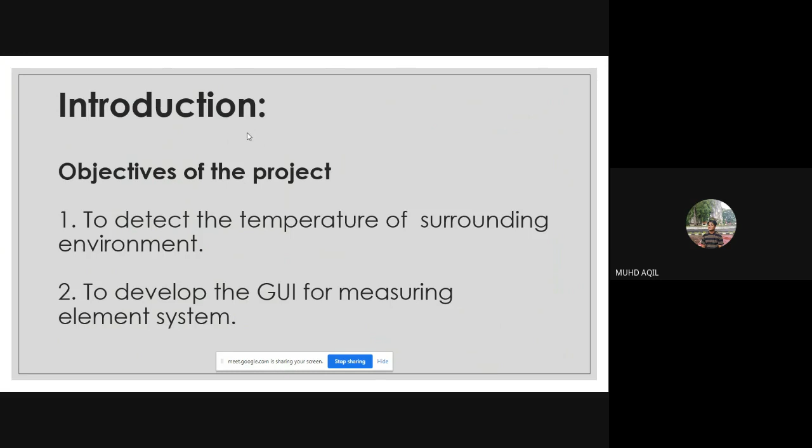For the introduction, the objective of the project: first, to detect the temperature of the surrounding environment; second, to develop a GUI for the measuring element system.

Now for the background research. First, we are targeting Malaysia only, as Malaysia experiences hot and rainy weather throughout the year. Second, the average daily temperature throughout Malaysia is between 21 degrees Celsius to 32 degrees Celsius.

Let me interrupt for a moment. It's okay, it's not that your marks will suffer if your English is not good. I'm just commenting so you can improve. For the 21 degrees Celsius part, I would insist you make it better by saying 'we are focusing and limiting our studies only to Malaysia,' rather than 'we are targeting in country Malaysia only that can be used,' which is actually very wrong and confusing.

So just say we limit our studies or our work to Malaysia. And the average daily temperature throughout Malaysia is between 21 degrees Celsius to, I'm not sure, 32 degrees Celsius is right or not — if I'm not mistaken it should be higher, because there was a time when I was riding across Shah Alam and the temperature stated there was 34 degrees Celsius. So double check your 32 degrees Celsius figure.

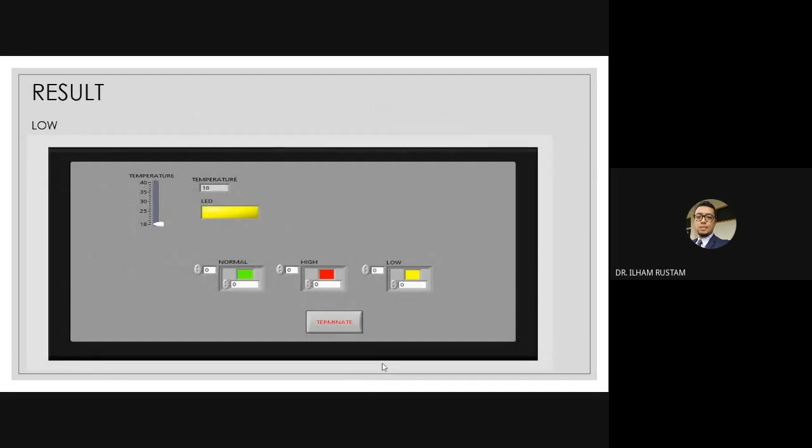That's my question. Can you go to the front panel? That's in the simulation. Oh, it's okay, simulation. Okay, then we'll proceed with your slide first, and then we'll go to the simulation.

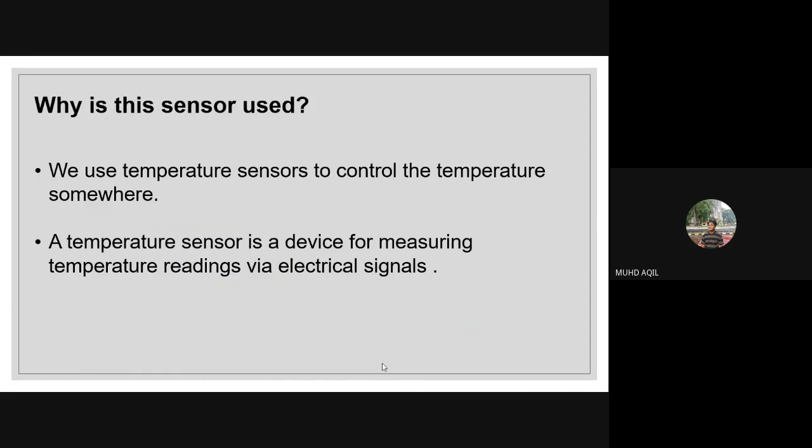Next, what is this sensor used for? First, we use a temperature sensor to control the temperature somewhere. We know that in Malaysia, there are only two climates, which are sunny and rainy. Second, a temperature sensor is a device for measuring temperature readings via electrical signals.

Next, how does the sensor do its measurement? Temperature sensor detects when the temperature is high, normal, and low. Second, we use three colors, which is red for high, green for normal, and yellow for low.

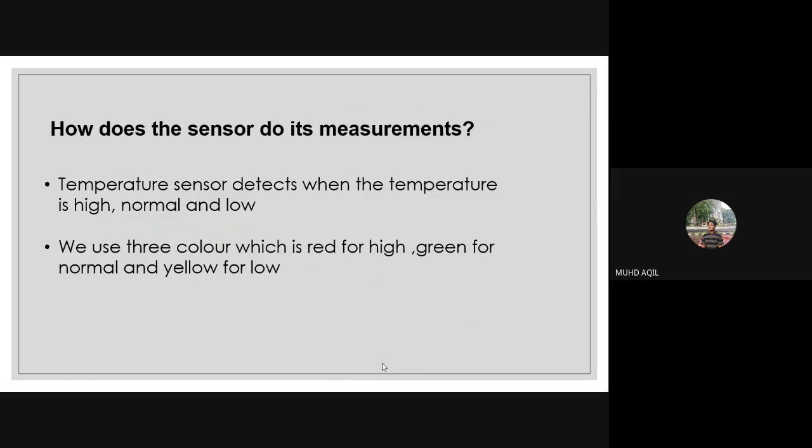Okay, for other examples of sensors that can be used as well, although not being used in our proposal, is the humidity sensor.

This sensor works to detect change in temperature in the surrounding air. This sensor works to detect...

This sensor is the same concept as the temperature sensor, that is, it detects temperature reading through electrical signal.

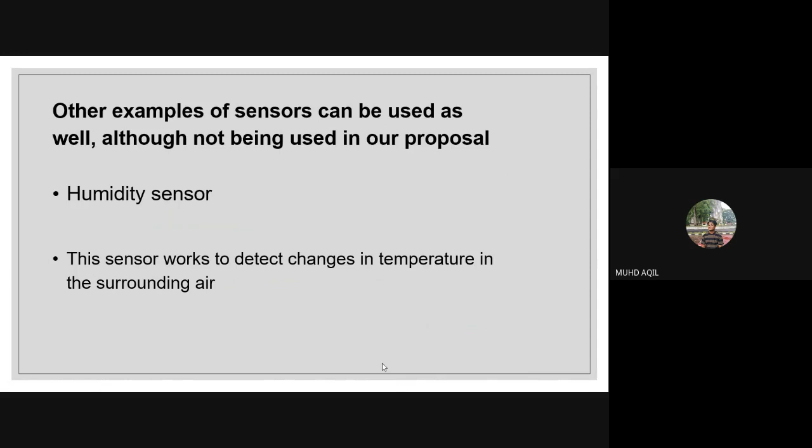Next, the graphical user interface, which is GUI. For our simulation, we use a temperature slider as our GUI. We use this temperature slider because it can control the temperature as we wish. And the temperature slider is connected to the numeric indicator.

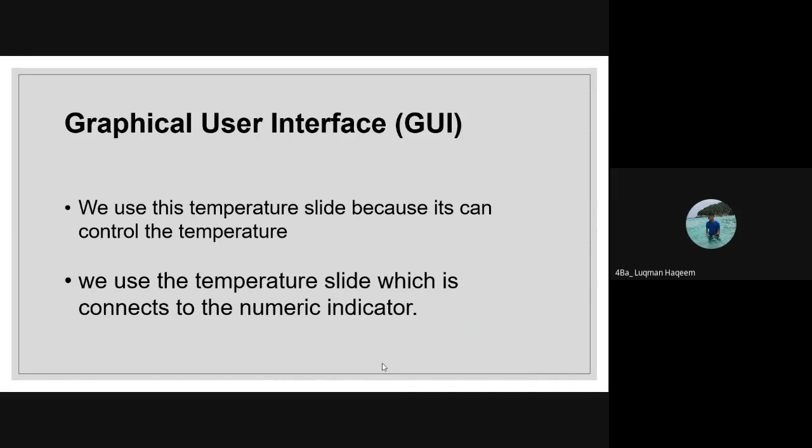Okay, next. For the result, this is the result for the low temperature. When the temperature is low, the LED will turn yellow.

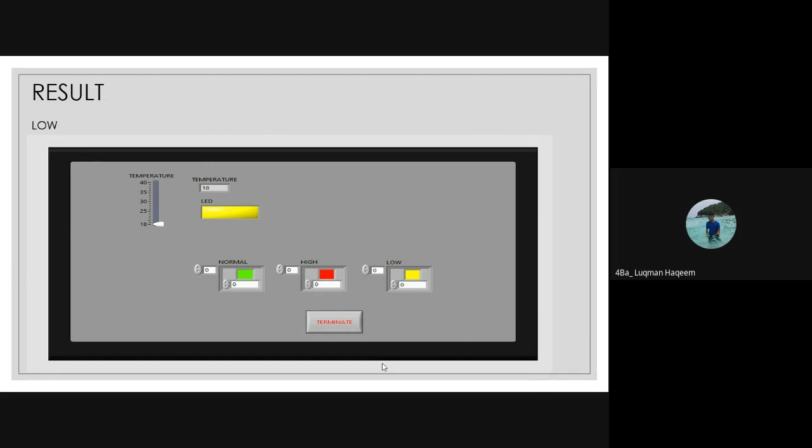And we go to the block diagram. No block. Okay, next we go to normal, which is when the temperature reaches 25, the LED will turn green, which means it's the normal temperature.

And next for the high temperature, when the temperature is above 30, the LED will turn red and show the high temperature.

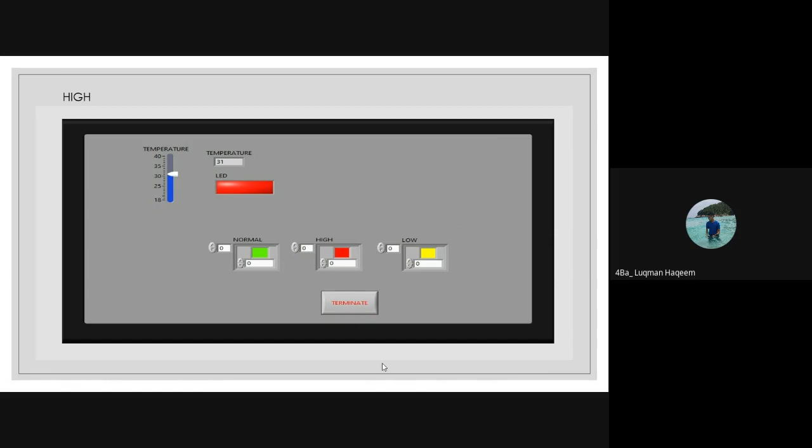Okay, next. Can you go back to another slide? For this one, I don't actually agree with you using the LED meter here because it indicates something like for normal, I could change the value or something. The first time I'm looking at this, I thought the LED that you put down there, the one that you didn't connect to anything - I understand now that your LED here is just to indicate the color of low, high, or normal operation, right?

Yes, yes. So when it has some sort of scale on the side and at the bottom, I thought this was something that I could change if I were in front of the front panel. So I don't agree with you guys using this. If possible, I think you can just use the LED there.

Can you go the same LED that you use for your while block diagram? So that same LED, instead of connecting it to the while condition, you can just put it outside, substitute that with the LED that you're using right now, and just change the color rather than like this. Because if you have a scale like this, it seems like I can do something to it, when the intention was just to indicate the color of the operation.

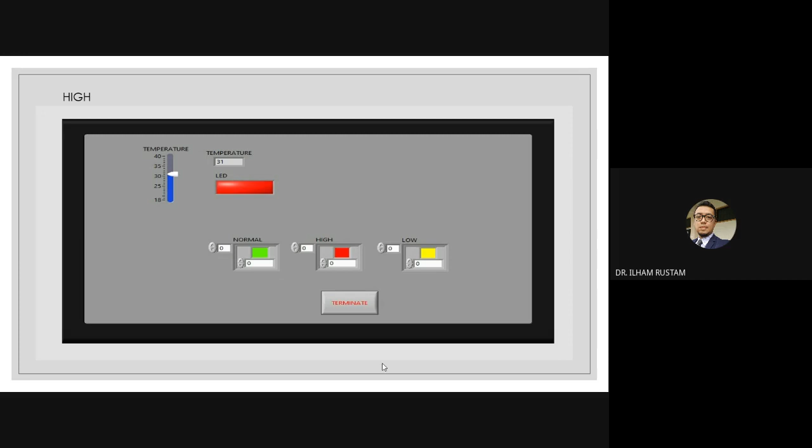Okay, next, last one, discussion. For our discussion, with the temperature control, we can control and detect the temperature around us and also provide comfort to others. Next, we identify some components suitable for the use of sensor.

We use the temperature sensor as our input to detect the ambient temperature, and the signal to the output is the LED.

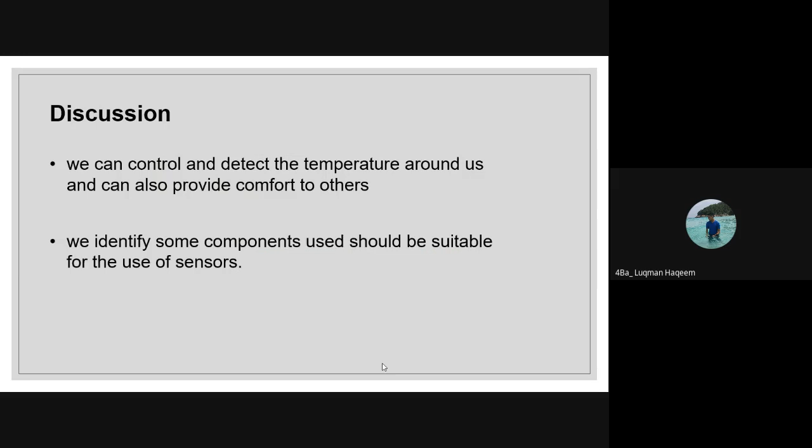Okay, next, for the last one is conclusion. Temperature control is a major problem of fast growing world and requires cost effective solution. This temperature control can be used in various industries such as mall, office, indoor theme park, and others.

Our advantage is that we can identify the ambient temperature and control it better so that the surrounding conditions are not too hot or cool. The disadvantage is that this project can only be used in Malaysia only, because the set temperatures have been programmed according to the current climate in Malaysia only.

Okay, thanks. Thank you for your presentation, for your work. But some extra comments that I think are quite major. First, the title is temperature control. Even in your conclusion, you've mentioned that this is actually a temperature control project. But in fact, if you look at the output, this is just a temperature indicator.

There's no control here. What is being controlled is actually your temperature slider. That means most probably if you set it in a room or in an area, it reacts to the temperature, it's not going to change the temperature of the room or the surrounding. It just indicates whether it is a normal, high, or low operating temperature. There's no control here, so that's a major problem with your proposal regarding the title, temperature control.

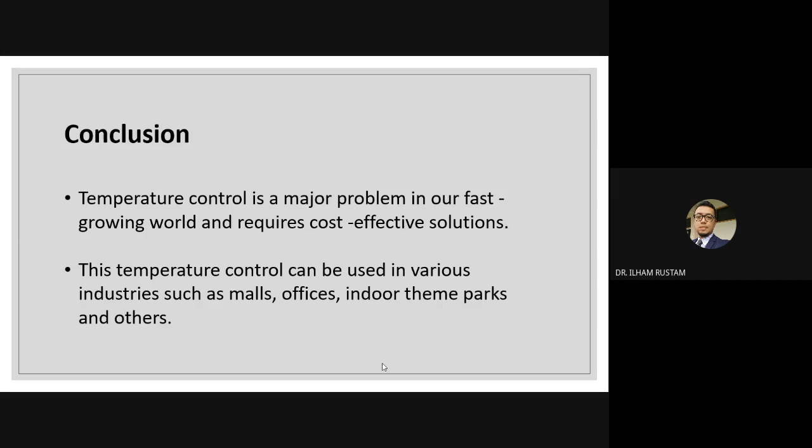But I'm just being frank with you. If you want to improve, if you want to make sure you get a good mark, just resend to me a video of your LabVIEW simulation to show what improvement you have done. And of course the title has to reflect that. If I address your problem, which is your title, make sure you mention the topic at the front panel, just type in text there, or if possible, if you know how. But if not, then the file name of the video should be okay.

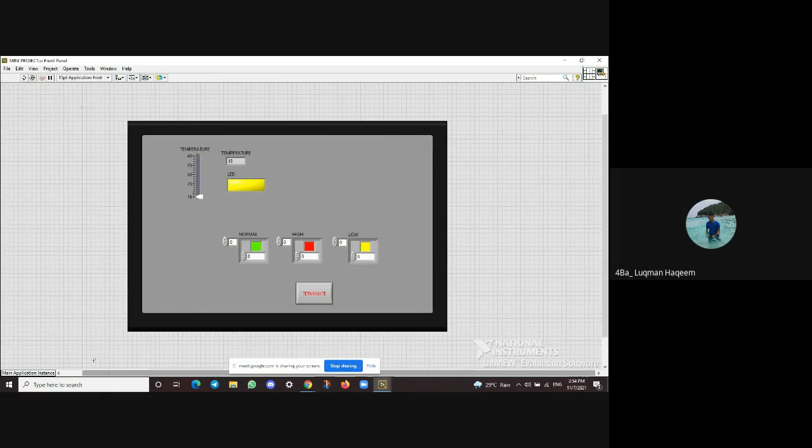This is our front panel, and this is our block diagram, which is similar to your report. So it's okay, it's good. So now just run the front panel simulation.

Okay, for the low temperature, the LED goes to yellow. For the normal temperature, the LED goes to green, and for the high, it goes to red. Anything above 30 is high, anything above 23 is medium.

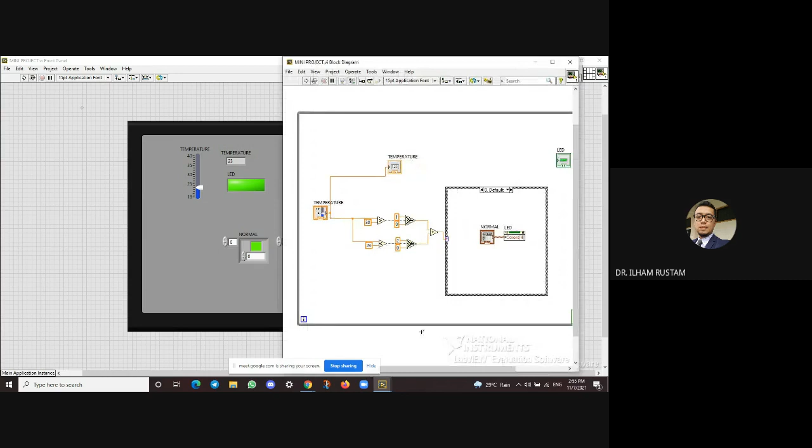Okay, good. So it shows that you did your work as intended. It's good, just some minor corrections, I think, which you did not reflect in your work on the topic and also on the conclusion.

So we need to resubmit our report? Not the report, just the simulation, the video of the simulation showing the changes that you've made.

So, if possible, try to add 'temperature indicator' instead of 'temperature control'. Put the title on top of the block diagram, the front panel here, that says temperature indicator. Just put the title 'temperature indicator' here.

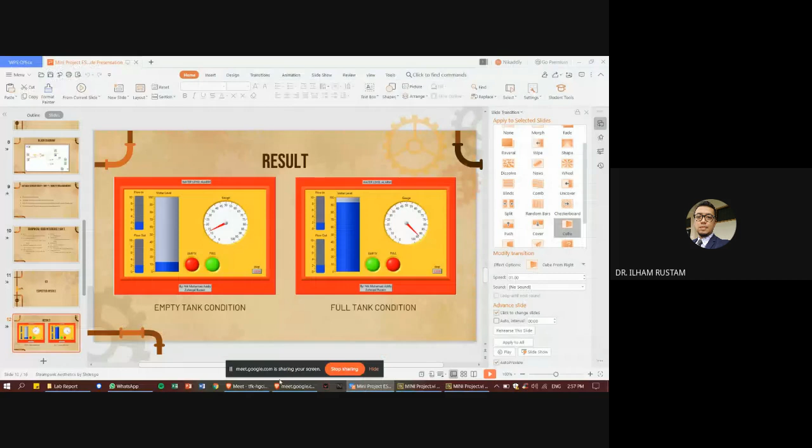So for the contents, we have introduction, methodology, result and discussion, and conclusion. So we go to the first one, which is introduction to the mini project.

So we will let you know our objectives. The first is to learn the working of a water indicator. The second is to avert and control the water level. And lastly, to produce a sound with the help of a buzzer when the water level in the tank reaches a predetermined level. That's our objective.

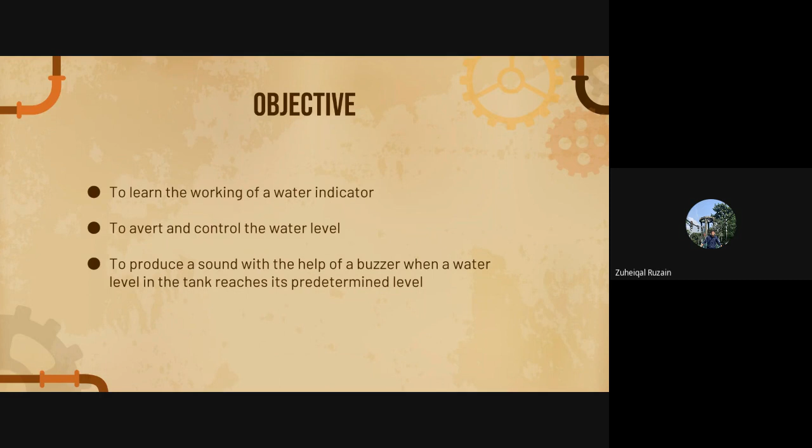So we go to the background research. It may be tough to accept that the water crisis has reached a point of no return because of excessive water waste owing to overflow in the above tanks. A water level alarm can give a solution to this problem by preventing it from becoming waste. This water level alarm employs a simple mechanism to detect and indicate the water level in an overhead water tank or any other water container.

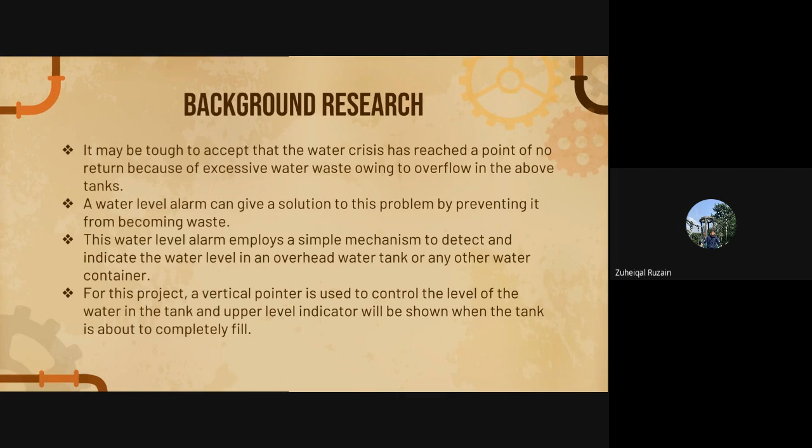For this project, a vertical pointer is used to control the level of water in the tank, and an upper level indicator will be shown when the tank is about to completely fill. So that is our background research. We go to number two, which is methodology.

So like you all can see, this is our block diagram and LabVIEW. Okay, next.

So what is the suitable sensor used, why we use it, and how its measurement works. The first one is water level sensor or detector. Why do we use this? Because to gauge and manage the water levels in a water tank. How does the detector measure? It does measurement by using a sensor probe to indicate the water levels in a water tank.

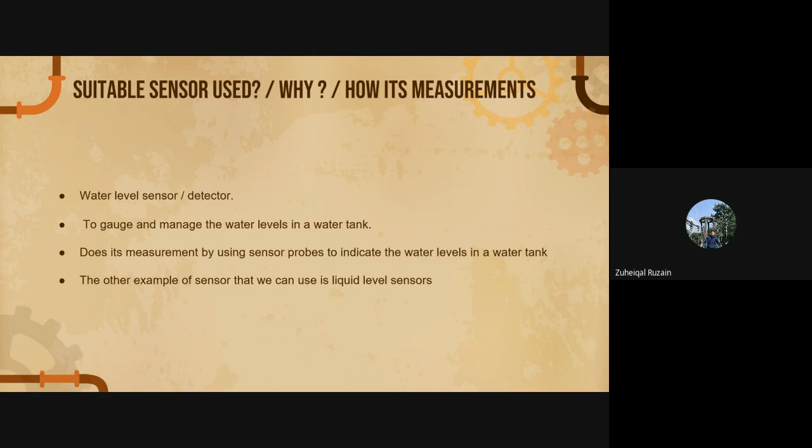Besides using this sensor, we can use another sensor, for example liquid level sensor, because its function is quite similar to the water sensor or detector. The function of the liquid sensor is used to monitor and regulate the level of a particular free-flowing substance within a contained space. That's the function of the liquid sensor. So that's for our method.

Okay, so next for graphical user interface or GUI, we use: first, to delay the flow rates of water. Second, we use in range and coerce; its function is to only operate in the setup range.

Next, greater or equal and less or equal, it is for the condition needed to operate. Next, add and subtract, it is a mathematical calculation for the project. Next, Beep.vi, it acts as an alarm.

Next, we use round LED. It is to notify the condition when it is met. Next, we use the stop button, its function is to stop the simulation.

After that, we use tank and gauge, it is to display the current water level. And lastly, we use vertical fill slide, it is to adjust the flow rates of water.

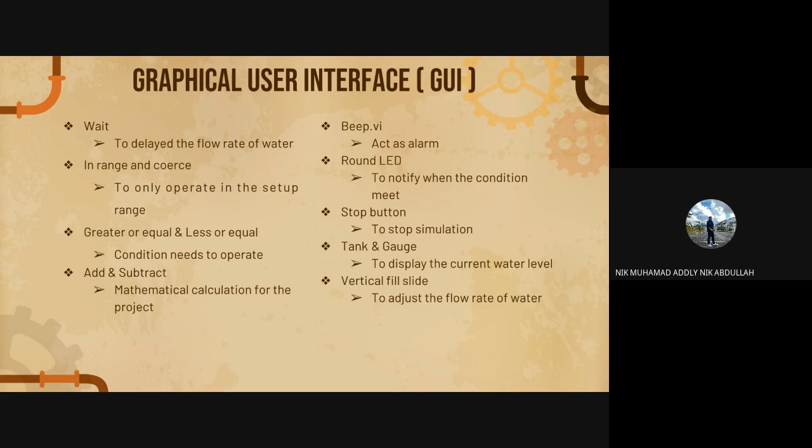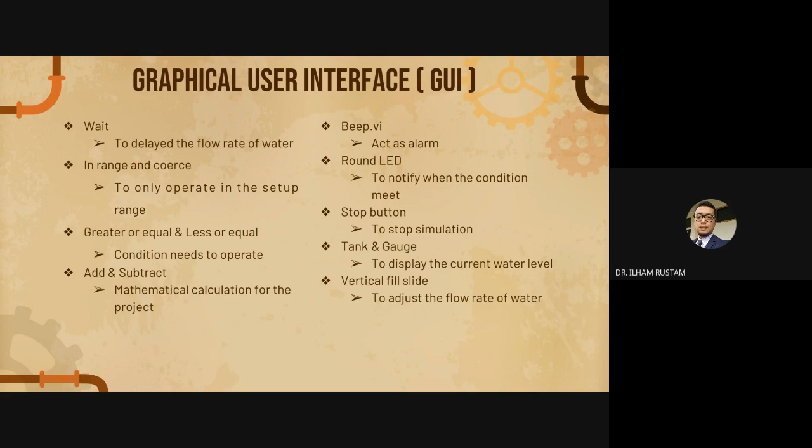Okay, sorry, can I interrupt for a bit? Which one did you use for the feedback, the additional block? What do you call that, the additional ad block, the feedback? Can you go to the block diagram? There, the yellow arrow going back to the feedback, to the additional block in the block diagram.

Which block is that? It's when we connect the right first input back to the output, back to the first input. It just shows yes, like that, and it automatically appears on that diagram. Okay, that's the name. And then what is the 100 and 0?

I'm not sure what block that is. Range, it's in range and coerce. Range block, in range, yes. Meaning, what does it do? Its function will work when our scale is at 0 to 100. Or it just limits, yes, the operation from 0 to 100 only.

Yes. And why do you need that? Because at first when we did our simulation, we didn't use that component, but our simulation did not simulate like what we expected. So after we did some research, we found some use this component.

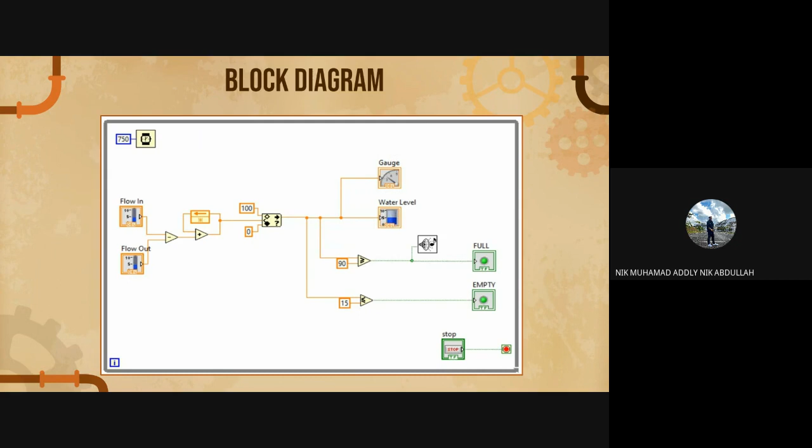But flow in and flow out, what is the range that you set there for flow in and flow out? 0 to 10, 0 to 10. Actually this is just in the block diagram, but in simulation, when the simulation is on, the flow in we can adjust from 0 to 10. The flow rate is per second, 10 liter per second. So if we go to flow in, it will show 10 liter per second.

Okay, maybe I myself haven't had a chance to do my own water level based on your range here, but I would think the issue is with the negative value. But since you put there 0 to 100, the range diagram there, so yeah, I think okay, good. It shows how you troubleshoot. That means you don't just sit there and then ask me around to solve it.

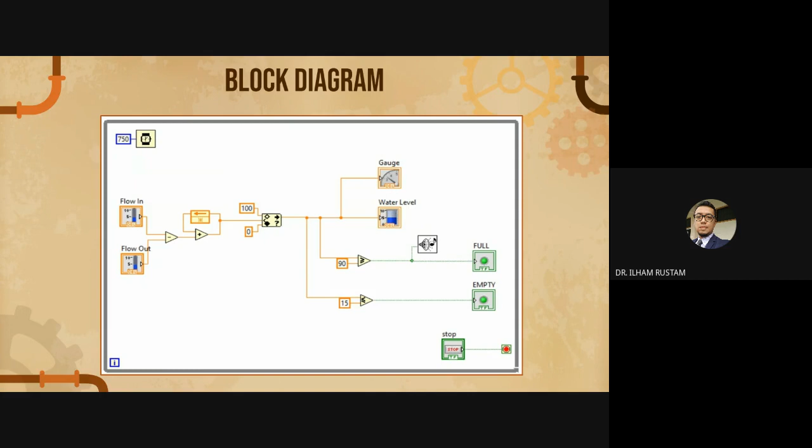I mean, you did your own research into it, but for me, if I were an engineer, most probably yeah, the same way that you did. But if I were a researcher or at least a manager level post, I need to come up with why the system needs to use that, because in real life it will most probably introduce a cost into the budget, which most probably will be extended. So if it's cheap, then it's okay. But chances are, if it requires a specific block diagram that is quite pricey, you need to justify that to your board of directors or whatever. So yeah, but for engineers, I guess just proceed. Okay, next.

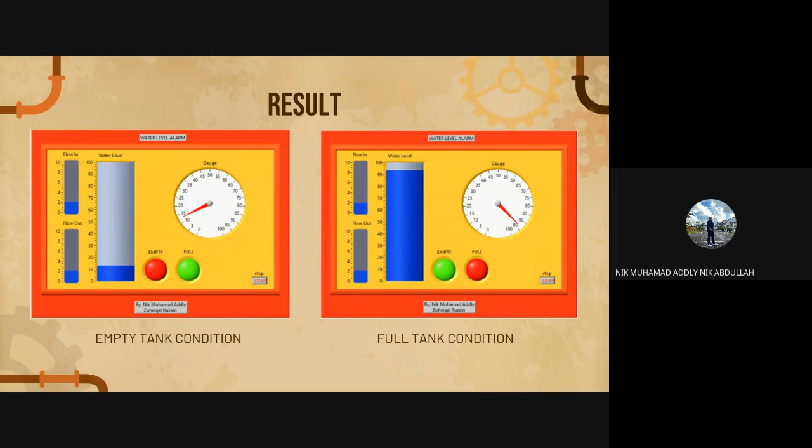Okay, so next for expected result. As you can see on the left figure, we can see the empty tank condition, and on the right one is the full tank condition.

Okay, so doctor, can I simulate our program? Simulate, not stimulate, simulate. Okay, please.

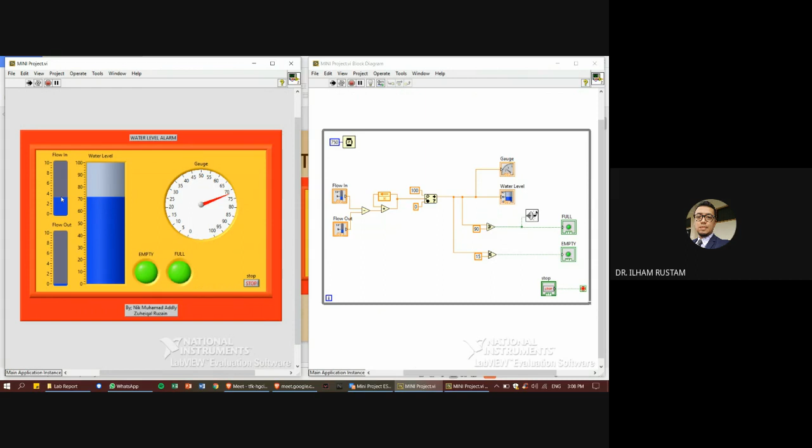Okay, so when the water level is below 15, the empty LED will light up. Okay, so that's why I didn't hear any beep, because you didn't connect the alarm on the empty side of the connection. Okay, okay, good. So I think your project is quite interesting because I thought it was flow in and flow out doing something else, but apparently your flow out is actually how fast the flow out versus flow in controls the water level. So yeah, I think it's a good job.

But just to double check, can you go back to the water level being full? I just want to hear whether the beep is working.

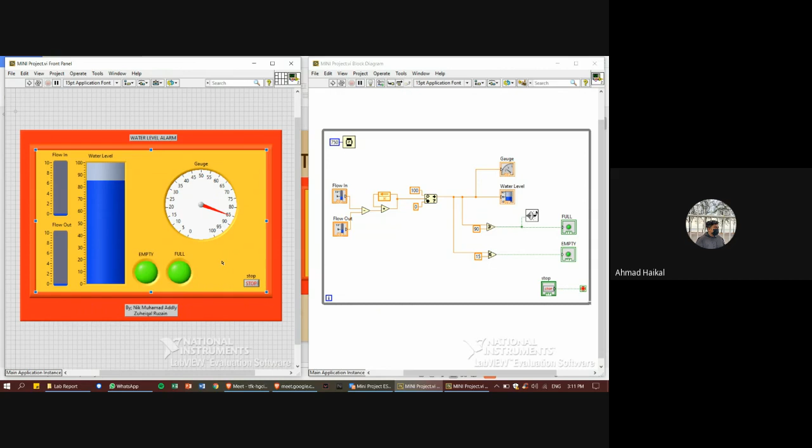the nuclear reactor in Russia, the Chernobyl blowout. The same like this - they turned off everything, turned off all the full maximum flow of the cooling liquid and turned off the system and whatever, but it still blew up because it's not directly controlled like the way we control our switches.

So that's why it's very hard for this kind of system. But for me, it's a good, interesting case project that you tried to show, because you're using flow. So yeah, it's a good point for you.

And my question was previously, what happens when the water level is at normal? As I can see here, it shows both are green lighted, meaning there's no problem. So okay, good job. Okay, next.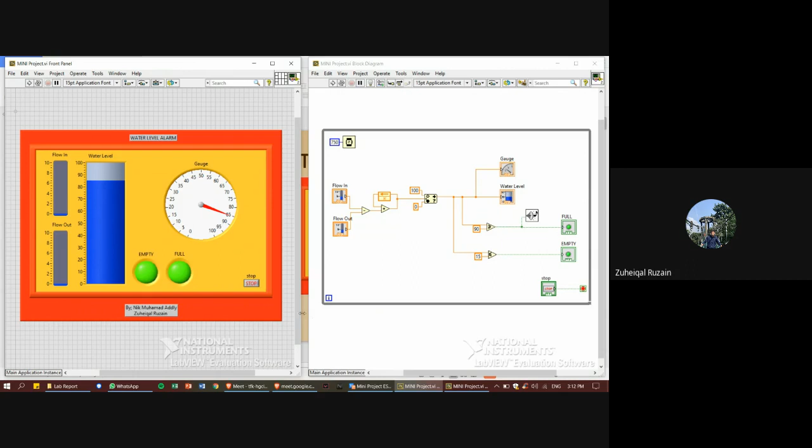Doctor, yeah, I think if you want the flow in to go faster, we can change the time delay. We have a delay, so we can see the water is flowing in immediately. But if we want it to go fast, we can just adjust this thing.

Okay, so what you have done is actually a more real case scenario by introducing the delay. So for me, it's a good job - you've been using the delay compared to just simply flow in, flow out, and then control directly like our lab. So you've taken the extra step further. It's a good thing, good job, kudos.

Okay, next, please proceed with the presentation.

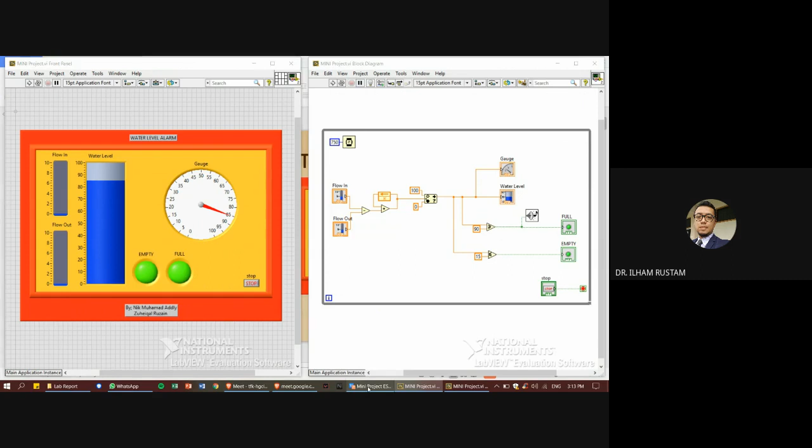Okay, so next for our discussion. First, when we worked on this project, we learned that every connection in the block diagram is very important, because when we were doing the mini project, we found that when we wrongly connect the connection, the final result is not as expected.

Next, we also noticed that the buzzer and LED played a big role for this program, because with both of them, we can know whether the simulation is working or not.

Next, we face a problem when using LabVIEW where the application crashes when we run the program. This is like what I just said before - when we run the program, it crashed. I don't know whether it's because of some component or because of my LabVIEW, but that's what happened when we were doing the mini project.

Okay, so the last one is for the conclusion. From this mini project, we can conclude that LabVIEW is a very good platform that students can use to make their projects.

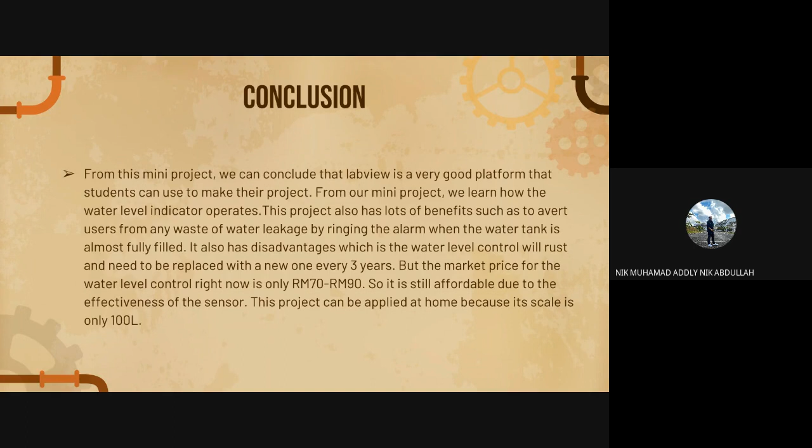Again, there's some confusion with the topics. You guys are not using water level, you guys actually control the flow in and flow out? I mean, of course, in the front panel you can adjust the flow in and also the flow out.

But in a real system, when you imagine this being applied at home, for example, can you actually adjust the flow in? Because right now in our house, you can go out to the front and adjust the valve from Syabas to make it flow in greater, but I don't think it's going to be 0 to 10. Most people will just close it fully or open it fully by maximizing the valve's turns.

And flow out is how much you're using. Of course you can control that, but this project, what I am seeing, is more like an indicator. So can you justify your topic that you chose as water level control? In what way do you see it is being controlled, the water level?

Even your objective here mentions water indicator, but there's also one that says avert and control the water level. So how do you see it?

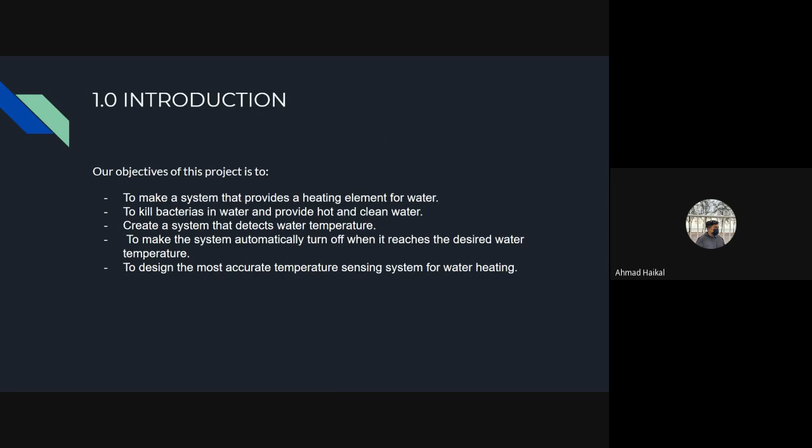And for the measurement, we use the thermistor. So, next slide.

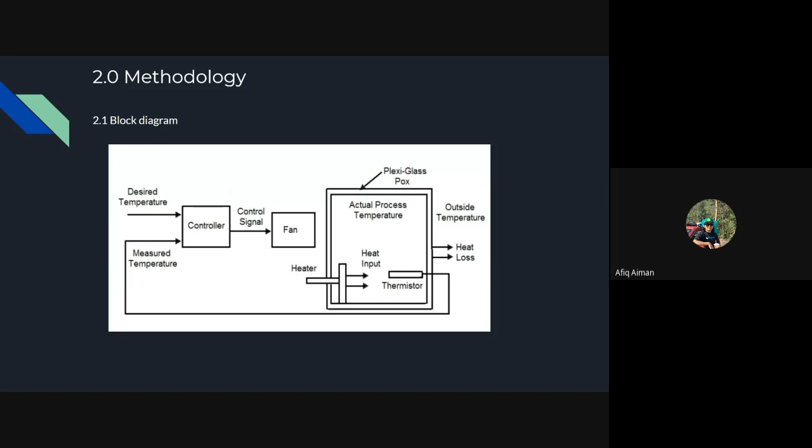As the measurement sensor, we use the thermistor. A thermistor represents another class of temperature sensor used to measure temperature based on the change of material resistance. A thermistor is constructed by a semiconductor material, in which the electrons are bound to each molecule with sufficient strength, so no conduction electrons are contributed from the valence band to the conduction band.

For the water heating element, we use the NTC thermistor, where when the temperature increases, the resistance will decrease accordingly. So when the temperature of the material increases, the molecules begin to vibrate and provide additional energy to the valence electrons.

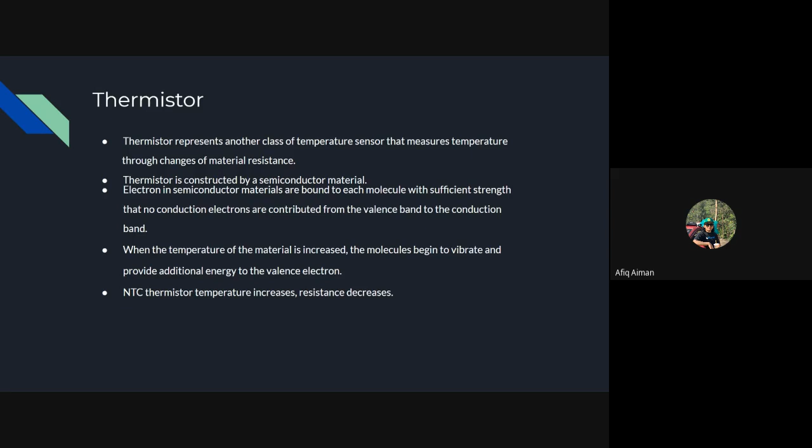So next, for another sensor that can be used, which we did not use in this mini project, is the RTD - Resistance Temperature Detector. The RTD is also a temperature sensor based on the concept that metal resistance increases with temperature.

The metals employed in these devices range from platinum, which is highly repeatable, sensitive, and costly, to other materials which are less repeatable, more sensitive, and less expensive.

So next, for signal conditioning, there are three types of signal conditioning that can be used. The first is current excitation - because the thermistor is a resistive device.

So the data acquisition system will need to provide a current source to measure the voltage across it. The current source must be exact and constant. The second type is the bridge.

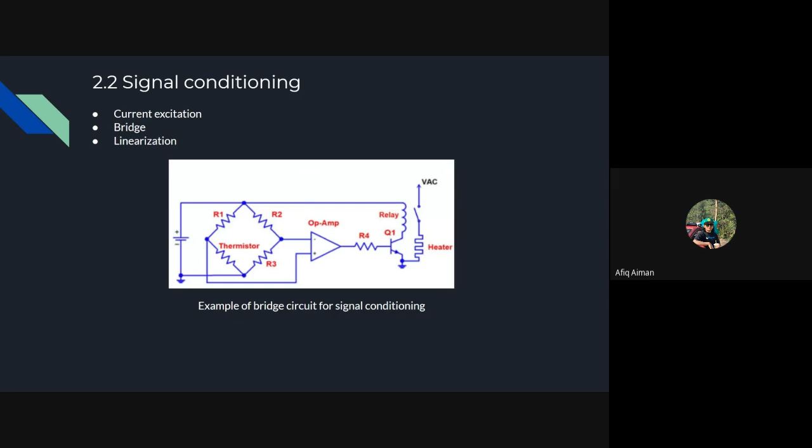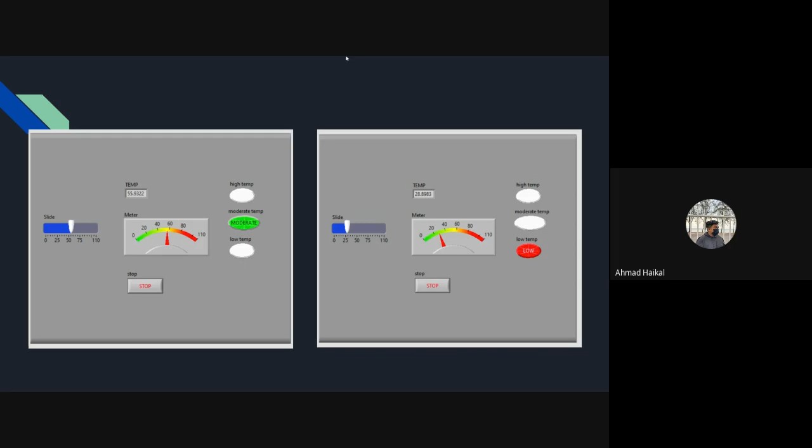This is because, referring to the front panel, we set the low temperature range as 29 and below. This is because we use the less or equal comparison block.

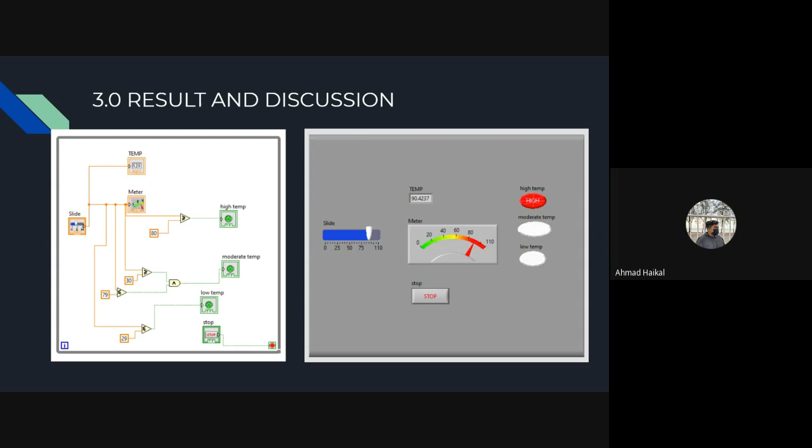So the conclusion of our project is that we managed to make a program that is able to heat up water and turn off automatically without any problem. This project sharpened our skill in using LabVIEW, because all of our program in this project uses LabVIEW.

This project can be applied in many places such as the water industry, cooking, and even at home. This project is not too pricey to be exact, but the bigger the project is, the more expensive it gets, because we need bigger components to make the water heating element. So the bigger it gets, the pricier it gets. So that's all from us.

Thank you. Okay, thank you, Haikal and... what was it again? Afiq. Afiq Aiman. Good job. Even your presentation, there's no comment from me, so I think you guys did extra. For me, I think it's a good job — not good, excellent job. Even your report here, you also included the references, which shows extraordinary enthusiasm.

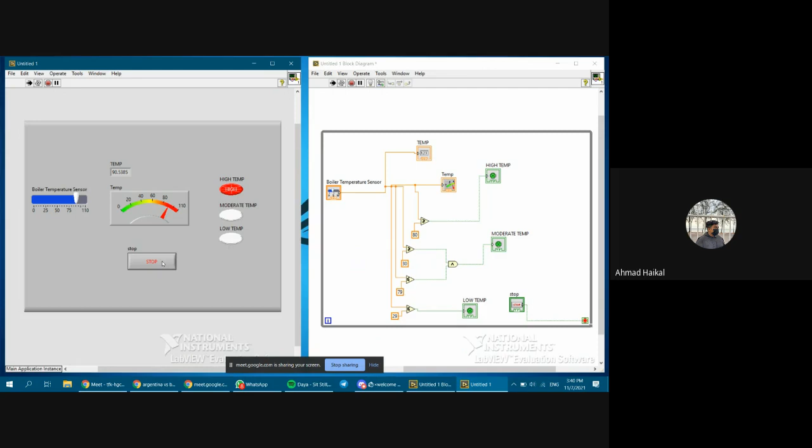Okay, that's all. Okay, thank you, Haikal. You guys did a very good job, I'm very impressed with it. I guess that should be the example. The effort that you did was exemplary, and thank you for your time. There's no comment from me other than it's a good job. Okay, thank you, Dr. Okay, welcome.

Okay, next we'll move on to the last group, which is Nurfadhil and Ahmad Fikri. For your group, I think it's also good, but again the problem is with your title and notes. So before I make my own judgment, I would rather hear it from your side first, so please proceed with your presentation. Okay, sir.

Assalamualaikum. My name is Ahmad Fikri bin Ahmad Asim and my partner is Muhammad Nurfadhil. Today we want to explain about our mini project, which is the water level controller.

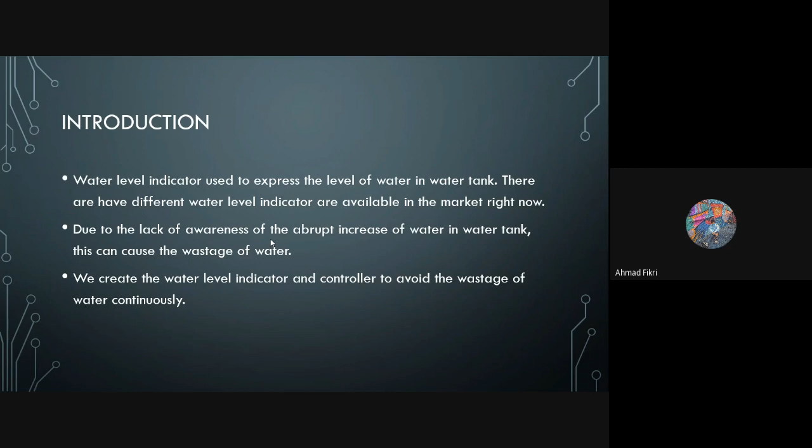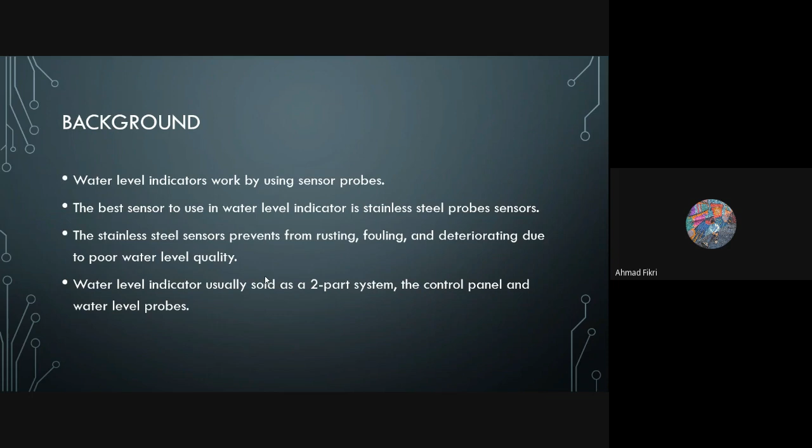For the background, first, water level indicators work by using sensor probes. Second, the best sensor to use in a water level indicator is a stainless steel probe sensor. The stainless steel sensor prevents rusting, fouling, and deteriorating due to poor water level quality. Water level indicators are usually sold as a two-part system: the control panel and the water level probe.

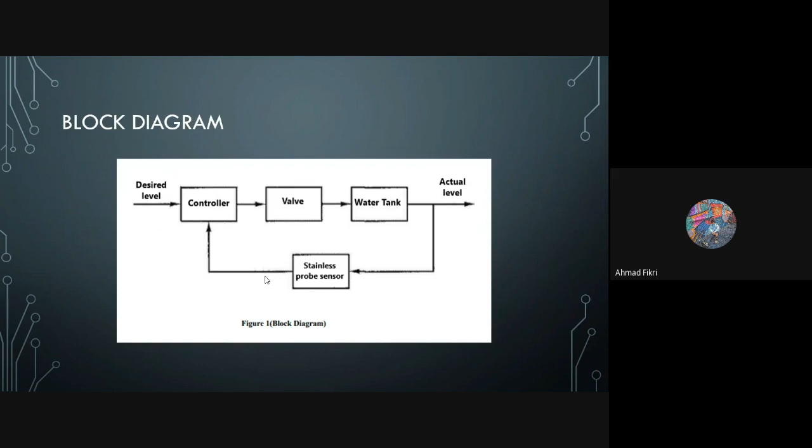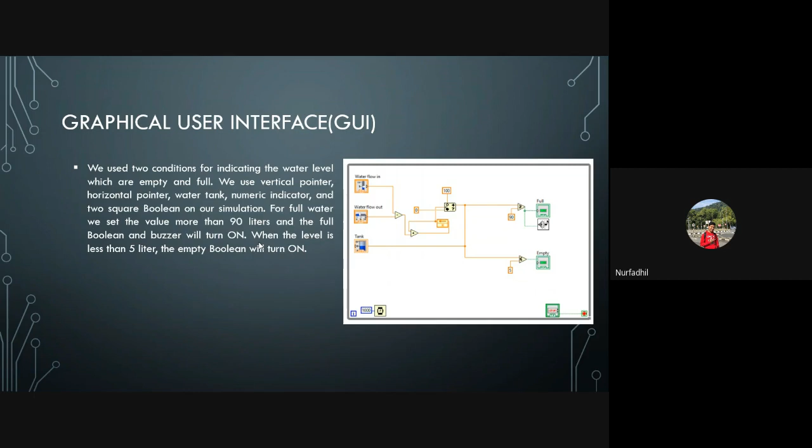For the graphical user interface, we use two conditions for indicating the water level, which are empty and full. We use a vertical pointer, horizontal pointer, water tank, numeric indicator, and two square booleans in our simulation. When the water is full, we set the value to more than 90 liters, and the full boolean and buzzer will turn on. When the level is less than 5 liters, the empty boolean will turn on and the full boolean will turn off.

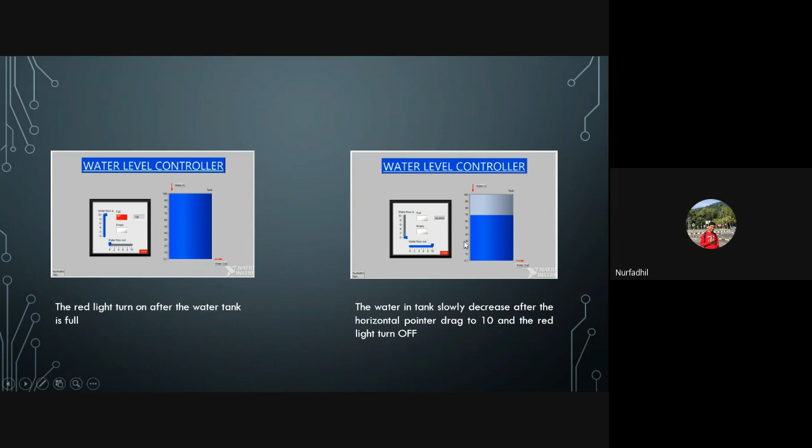Okay, for the next figure, we can see the water in the water tank slowly decreases after we drag the water flow in to 0 and water flow out is 10, and the red light will turn off. After all the water flows out from the tank, the green light will turn on again.

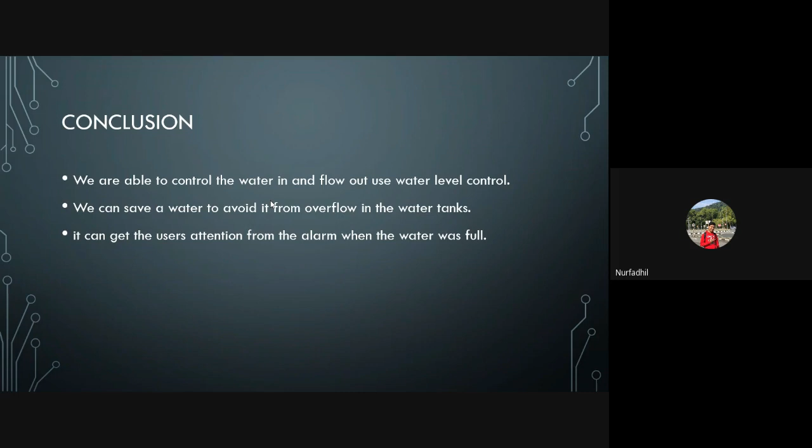For our conclusion, we are able to control the water in and flow out using water level control. We can save water to avoid overflow in the water tanks. It can get the user's attention from the alarm when the water is full, using the alarm we installed. Okay, that's all for us.

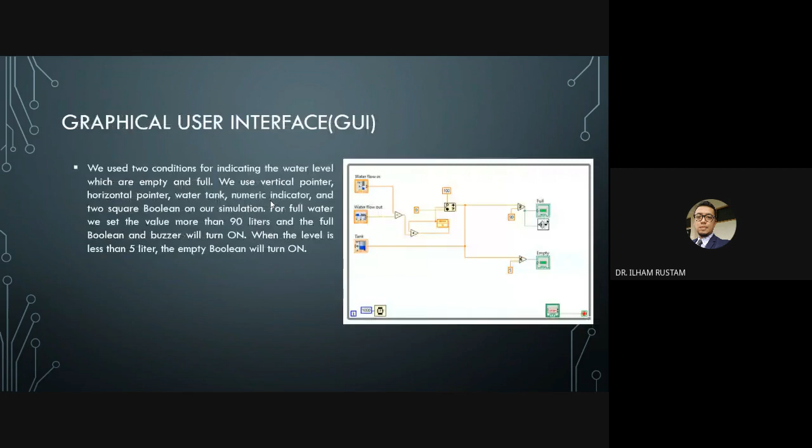Okay, some comments. Again, the same problem with the previous two groups, which means you're actually not controlling, because your program is not doing automatic control, right? It's just indicating, so you have to change the title. Also, if I'm not mistaken, your objective number 2 again is to control the water in and out of the tank, which means yes, you can manually adjust, but if you put this onto your system in your house, you will not be able to control it because this is more like an indicator only. You just set up the alarm and also indicate whether it's full or empty. So the same thing as the previous group.

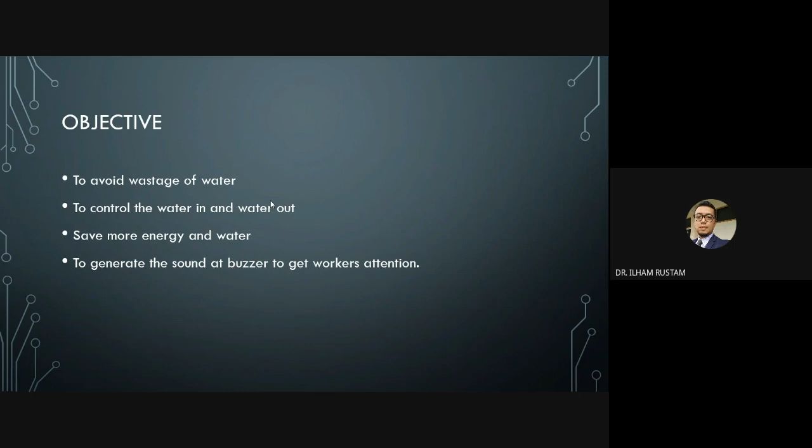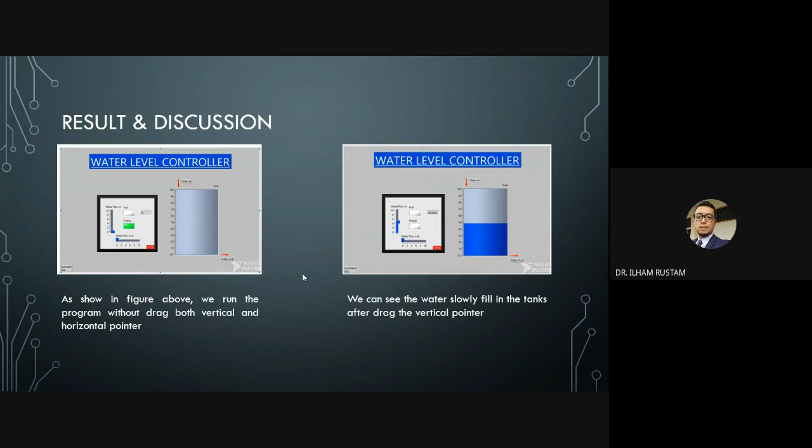I'm not sure, but this is almost similar to the other group, which shows water flow. You have feedback here, and you have the same block diagram, range 0 to 100. I hope you did it yourself, but regardless, I just want to see the problem definition, which is also similar, showing that you cannot control, but more on the indicator.

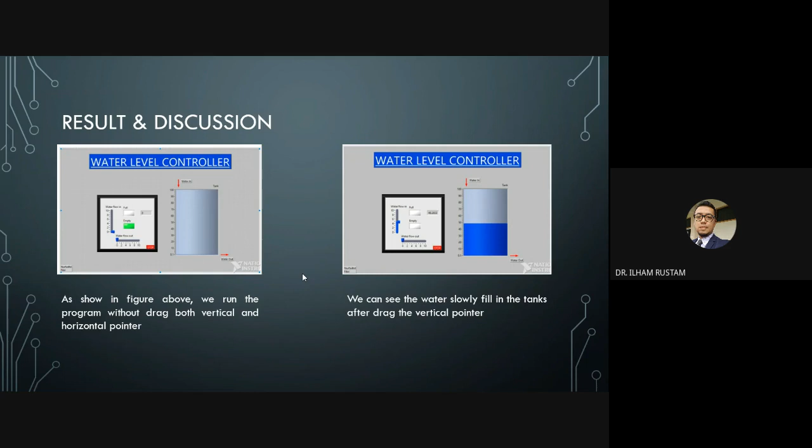Okay, so can you show me your simulation? Okay, this is our front panel and this is our block diagram. Okay, it's empty, and it slowly fills in with the water. Because you're using a larger delay, it fills up quite slowly compared to the other group.

Okay, now it's full. So if you're saying this is a water level controller, what the system would do is after the red light shows that it's full, it will automatically increase the water flow out to reduce the water level. That's what a water level controller is. But what you're doing right now is more towards a water level indicator, because you have to manually move the water level flow out. Only then will the water level reduce back to middle or empty, right?

Can you move the water level flow out? Why is it not moving? Delay. Okay, but delay 100 shouldn't be that long. Oh okay, because you turned it on quite long. All right, all right.

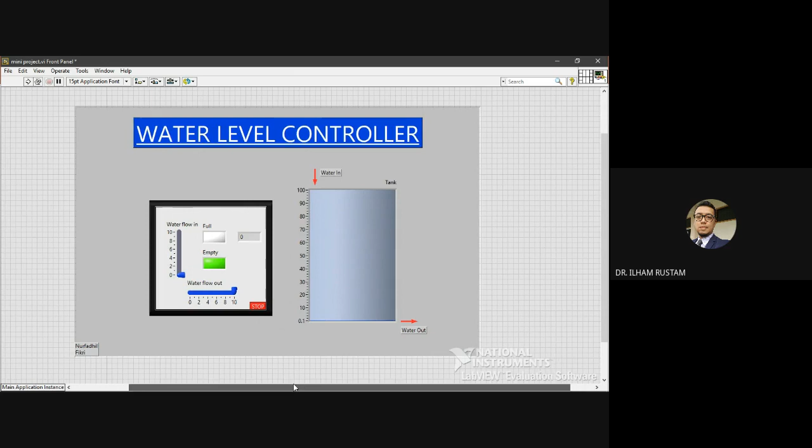So for a controller, you don't need to even touch the front panel after that. So if it's an indicator, you have to manually move the water flow out and water flow in to adjust to get your desired level. So yeah, you have the same problem as the other group. But at the very least, your presentation is changed so it makes it yours, much cleaner and more concise compared to the other group. So kudos to you on that.

But again, since you have the same problem, I guess you have to resubmit your report to prove that you have done the correction and whatnot, so that I can give you the proper mark. Okay, sir.